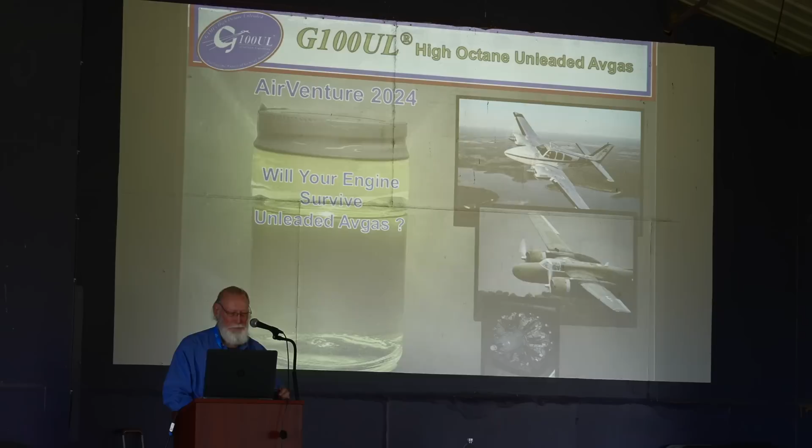Of course, nothing could be further from the truth. Nothing could be further from the well-documented truth, with an enormous amount of data to the contrary. So today, one of our themes is to simply ask you to believe the data. Let's focus on data.

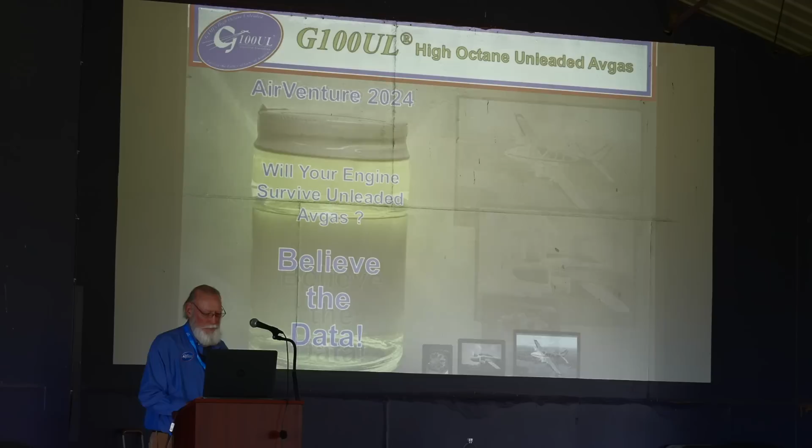So we're going to press on, and so I'm going to have a little bit of fun. Listen not to the GAMA and NATA chorus. That's the National Air Transportation Association, and GAMA is the General Aviation Manufacturers Association. Listen not to the GAMA and the NATA chorus loudly denouncing GAMI's FAA-approved AVGAS.

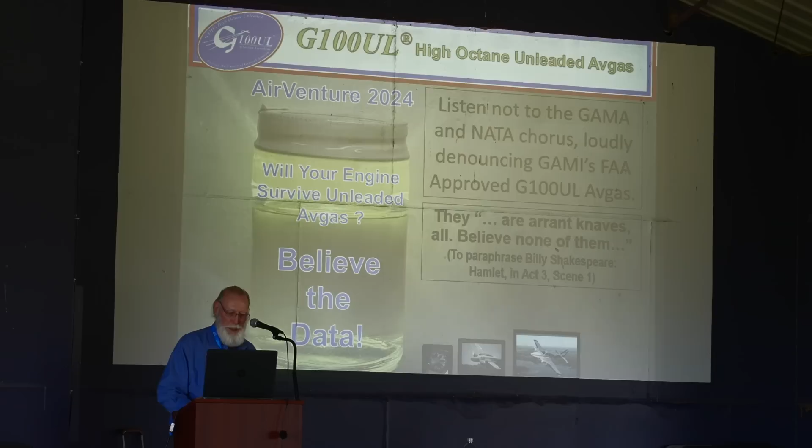So I'll take a little literary license. They are arrant knaves all, believe none of them. That's paraphrasing some guy named William Shakespeare, Hamlet, Act 3, Scene 1. Those knaves have no data.

I've used this slide off and on for the last 14 years. I was standing here, I believe, in the summer of 2010. We had a tent forum here about, oh horror, losing leaded avgas. The microphone was finally passed around to the president of Lycoming, Michael Kraft, and I remember specifically, I wrote it down, the first words he said to the crowd of about 3 or 4 times this size: we have to stop loving the problem and just fix it.

This is not a new problem. In about 1930 or 31, some guy nobody's ever heard of named James Doolittle flew an airplane from Ottawa, Canada to Washington, D.C., to Mexico City. It was a high-performance airplane, a speed racer. He had started using tetraethyl lead in his fuels, but he knew when he got to Mexico City they wouldn't have any leaded fuel, so he took a jug of tetraethyl lead with him. On the flight into Mexico City it started leaking, and he got so sick he could hardly land the airplane. He later wrote about it and said lead is not the solution, we need to find a better way to generate octane. Folks, that was 90 years ago. We can do better.

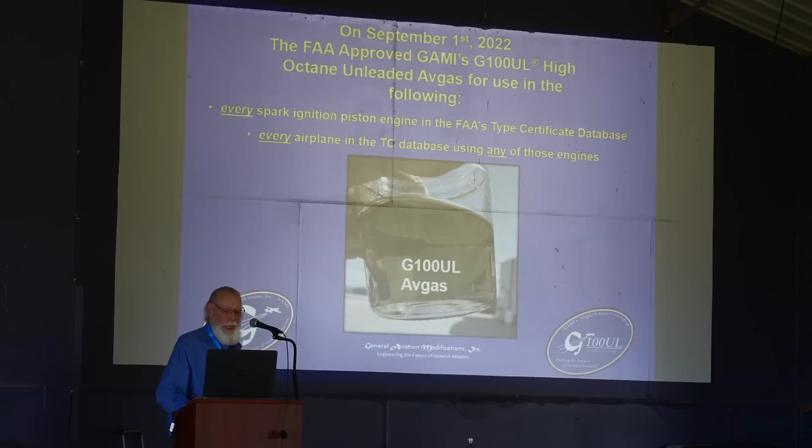Nearly 2 years ago, the FAA issued a fleet-wide approval for all of the aircraft spark ignition piston engines for G100UL, and they also approved all of the airplanes. The rotorcraft are pending, but they're well along in the certification process. I had an hour-and-a-half meeting with the FAA on Tuesday, largely focused on that subject.

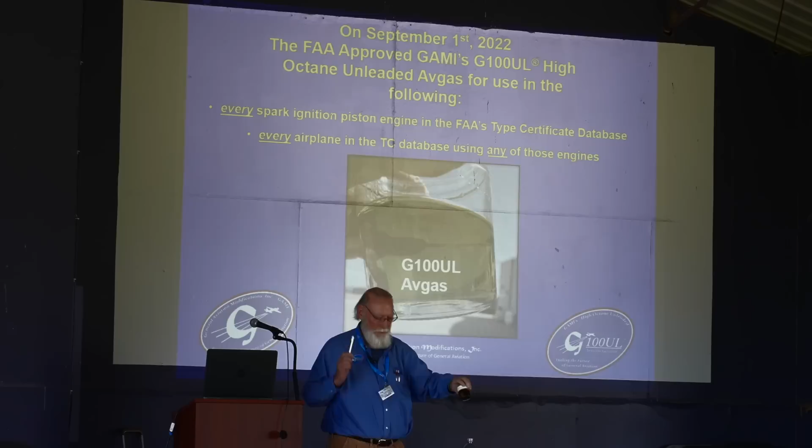So what you see here is the gas. This is a fairly aged bottle from about a year ago, but it tends to be green, yellow-green to blue-green, depending on exactly when it was made, and how much 100 low lead has been mixed with it.

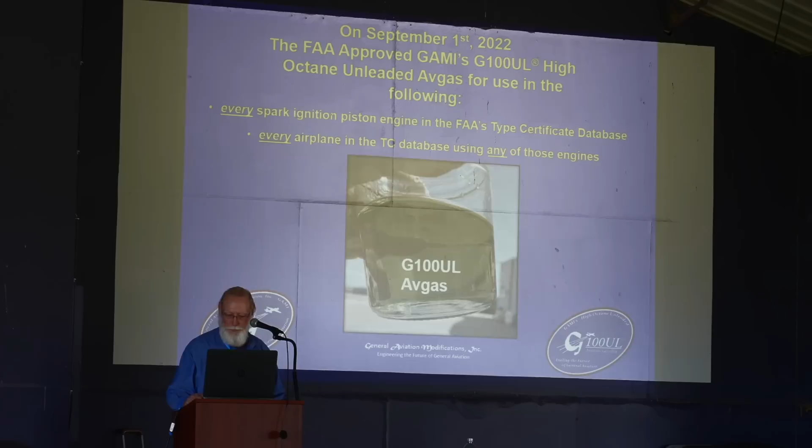At Sun and Fun, the announcement was made that G100UL gas is now commercially available. There's about 1.3 million gallons sitting in this tank right here in Baton Rouge, Louisiana, on the Mississippi River. We can ship fuel by rail, by truck, by river barge all the way to Pittsburgh, and by ocean-going barge anyplace in the world. One foreign civil aviation authority has already gone through the work with the FAA and done the Civil Aviation Authority peer-to-peer coordination, and has now approved all of the STCs for use in their country, and they're in the process of purchasing fuel that would leave by ocean-going barge from this facility.

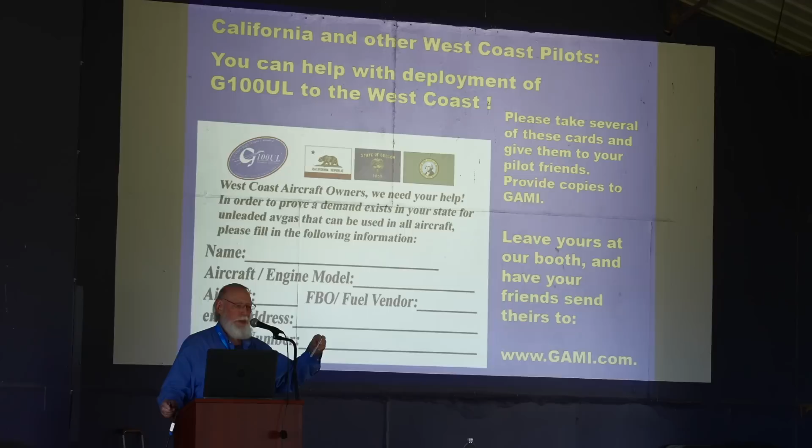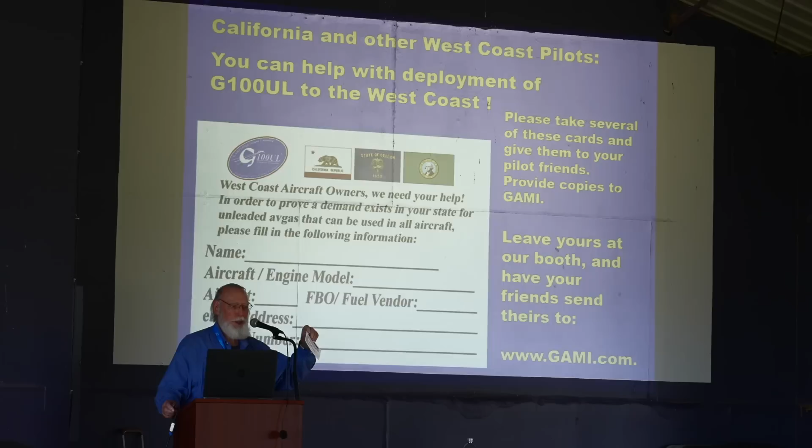So we have some of these little cards. How many people are here from the West Coast? Thank you, this card is directed for your attention. I've got a few of them, Tim Roehl over here has got some, or you can come by the booth, Tim's right there by the tripod. We'd like for you to fill these out and let us know who your vendor is, and if you don't want the fuel there, then don't bother to fill it out. But I'm going to assume that if you go to the trouble to fill it out, that you want G100UL available to you at your usual airport.

So remember, the phrase of the day is believe the data. I think most of you that know us and have experience with us realize that we've got a 25+ year history of innovating and certifying a lot of really nice products.

Many of you have. How many people in here have got GAMI injectors on their airplanes? There's 36,000 sets of those out there right now. The turbo-normalized Cirrus we did has millions of trouble-free operating hours on that fleet of engines. So we've got a long history of innovating and certifying new, innovative products. We've been Aviation Consumer Product of the Year several times.

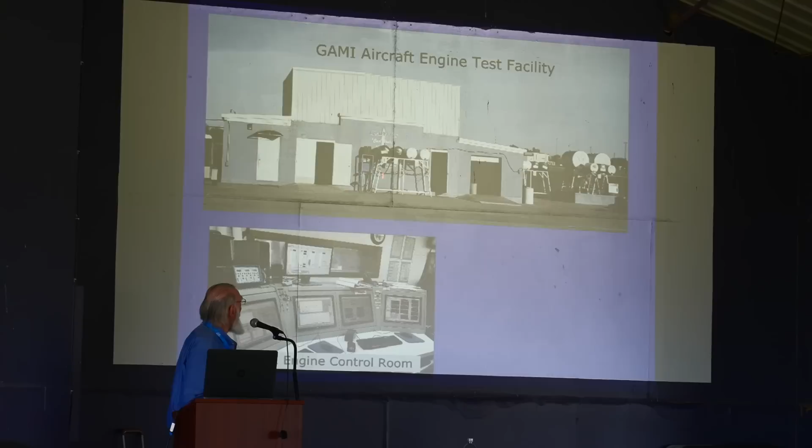This is GAMI's Aircraft Engine Test Facility, otherwise known as the Carl Goulet Memorial Engine Test Facility, and that's a mouthful. Carl Goulet was the Vice President of Engineering at Continental for 25 or 30 years. He personally designed almost all of the Continental engines in use today. He retired, became a DER, and we were using him on the GAMI injector project. He pulled me aside one day and said, "George, you and Tim need to build a test cell." "Well, I don't want to do that, it's expensive, la-di-da-di-da." "No, you really do." "Well, why do we need to do that, Carl?" "Because you won't believe what you will learn and what you can do if you do that." He was right.

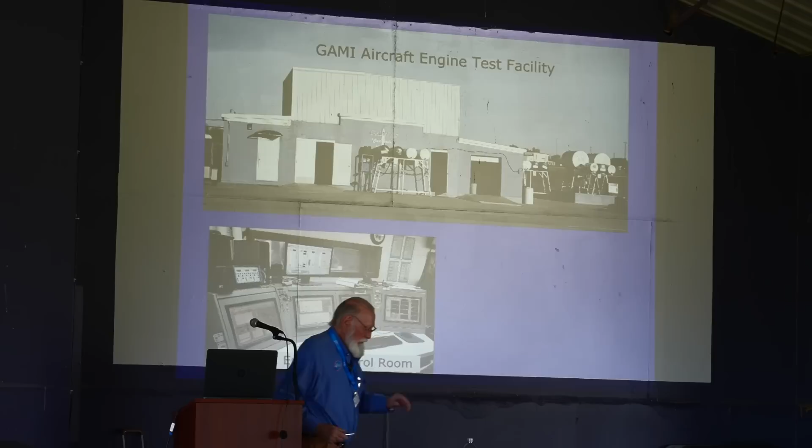So you see here also the control room. You see out here the tanks. I don't want you to think, why in the heck is he pointing out the tanks? Well, at the back of each one of those tanks is a solenoid valve, a solenoid valve that looks like this one, except it's got a coil up here.

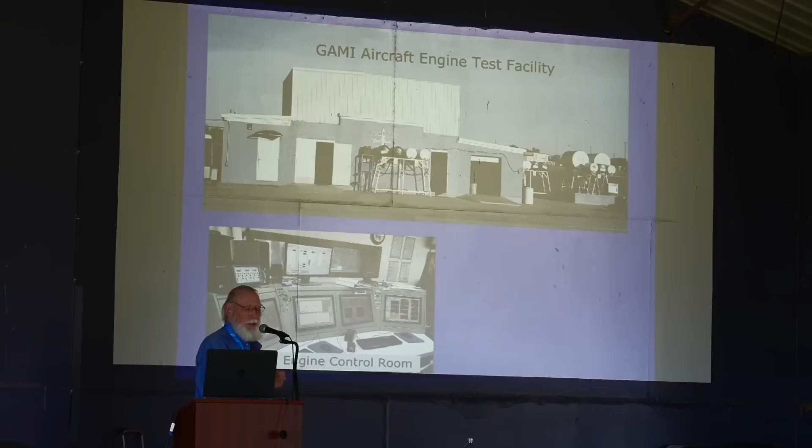This is the diaphragm in the middle. We use solenoid valves at both ends, out here where the tanks are, on all the multiple fuel lines that come back up into the engine here, and then there's a double parallel set of solenoid valves right at the engine. They work in parallel with each other. If you switch off one fuel, it switches two solenoids, so that in case one of them leaks, you don't get any contamination of fuel from one fuel type to another. We'll come back to that subject.

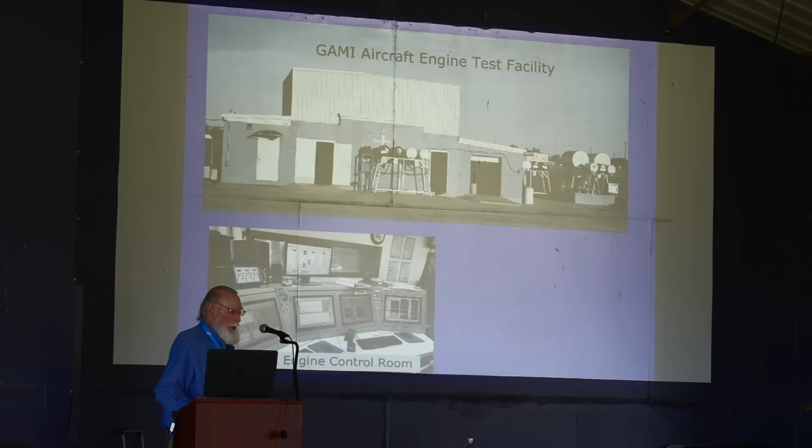And then you can see the instrumentation here. It's at least modestly sophisticated. How many pilots in this room have been to an advanced pilot engine management seminar class? So every one of you has had time to watch an engine run standing in front of this console. Is that correct? All right. So that's kind of open and transparent. And that's been open and transparent to a lot of people that should have, but have failed to take advantage of the opportunity to investigate further.

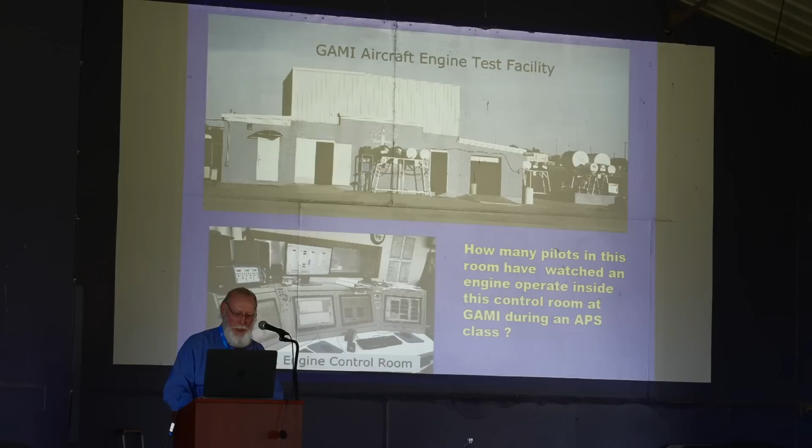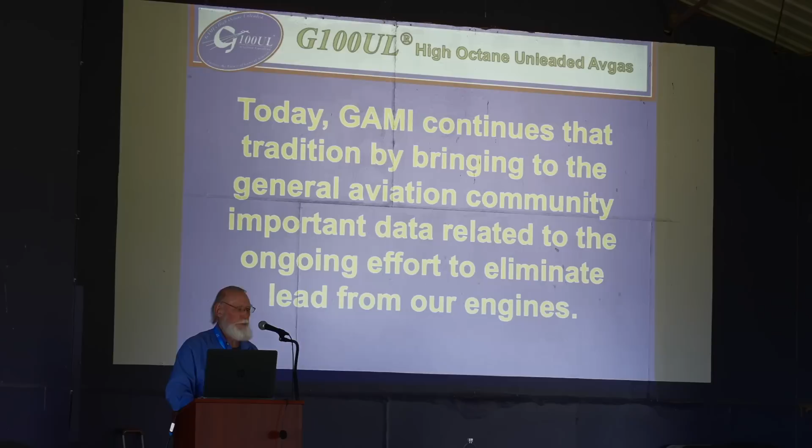So we have consistently supported the introduction and acceptance of our products by providing very high quality engineering data. And today we're going to continue that tradition by bringing to you and the general aviation community some important data related to the ongoing effort to eliminate lead.

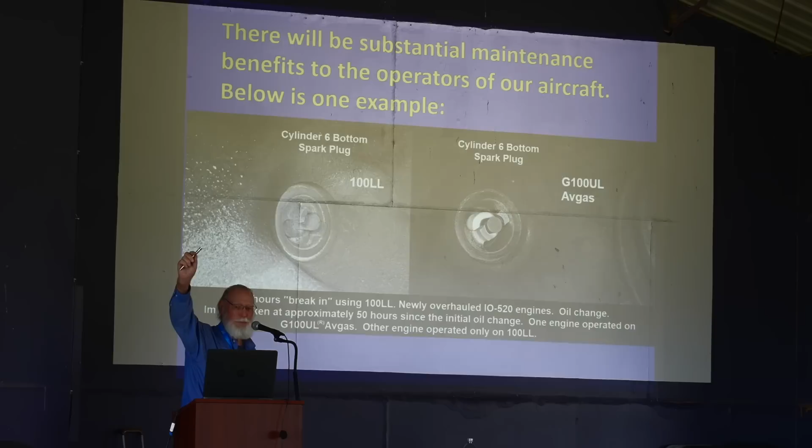How many people in here have never cleaned a spark plug? Never cleaned a spark plug. There you go, this young man right there. Stand up, sir, take a bow.

I showed this data on the oil analysis to the head of maintenance for the Commemorative Air Force, fleet of 200 warbirds that he's in charge of. And he said, 'Well, what about spark plugs?' And I said, 'How many spark plugs are in an R2800?' He says 36. I said, 'How often do you clean them?'

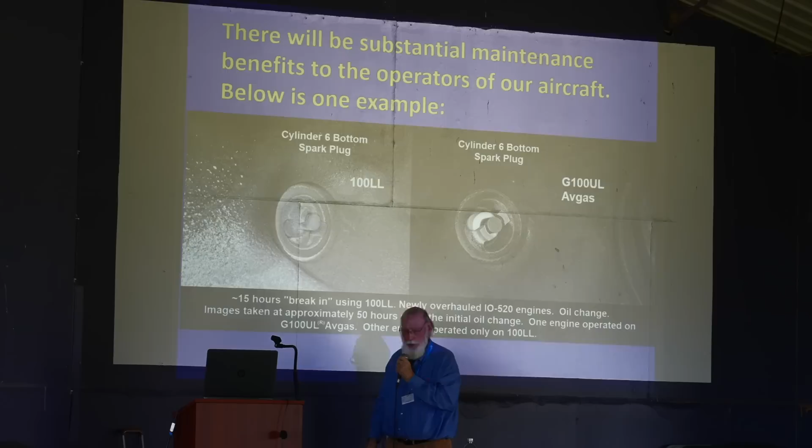'Every 50 hours.' I shoved this picture across the table to him, and I'm going to show you what he did. He sat there at his desk and looked at this, put his finger down on that and said, 'That's the fuel I want in all of the airplanes in the Commemorative Air Force.'

It takes 3 or 4 men 2 or 3 hours to take the cowl off an R2800 before they get to the spark plug, and it takes that many more to put it back on.

This is a huge change. We may well be able to go annual to annual, or double annuals, or maybe almost on condition, without having to ever pull and clean spark plugs.

In addition, our oil change intervals should easily double or triple. And when we then move to synthetic motor oil, our oil change intervals could easily get out to 150, 200 hours.

This is technology that all of us old people are inherently familiar with. When I was 16, 18 years old, we changed the spark plugs every 6,000 or 8,000 miles. We overhauled engines at 70, 80, 90,000 miles in my Pontiac Le Mans.

And I hadn't overhauled an engine in the last 20 years, and I don't remember ever paying for a spark plug in the last 20 years. That's what happens when you get rid of the lead.

Hey George, can you go back one slide? You said that overall, is the overhaul before those hours or in those hours? Now, this is at the end of 180 hours, but it's a composite of all the oil samples in between.

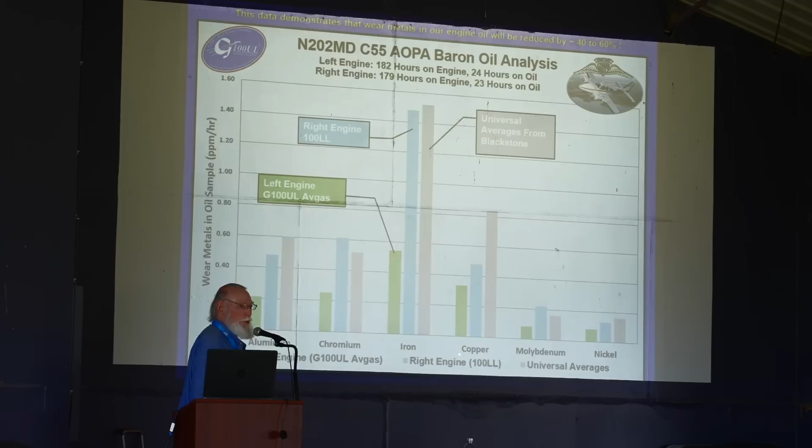Lots of borescope pictures. By the way, the gray bar that you see here is the universal averages from Blackstone for leaded gas in airplane engines. You can see that the 100 low lead engine matches the universal averages reasonably closely, maybe a little better, but that's probably because they've got better operators.

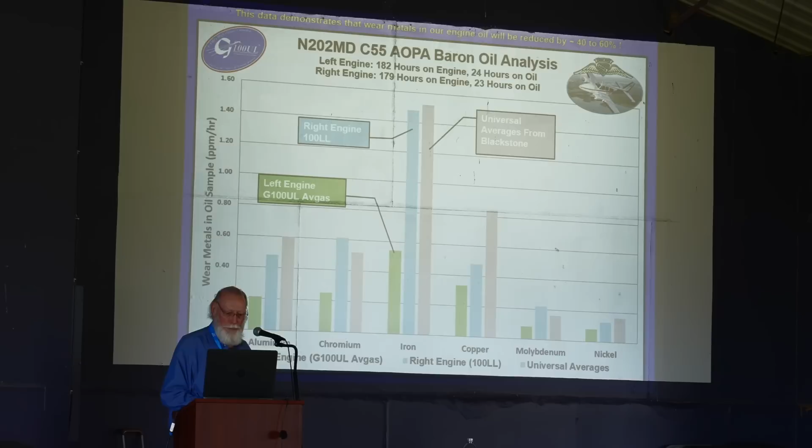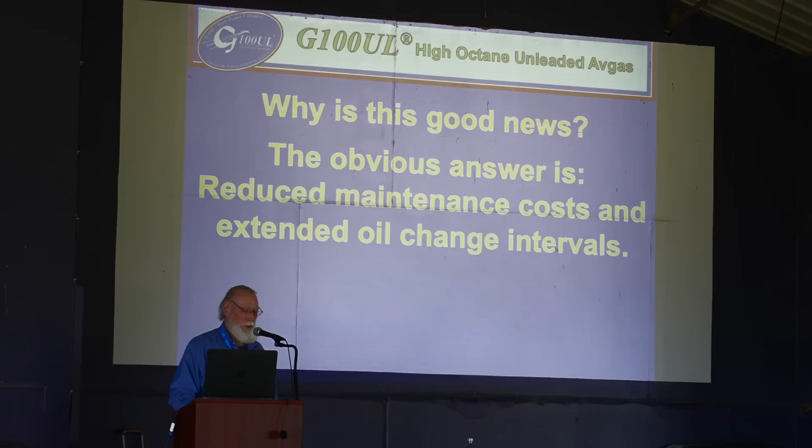So the obvious answer as to why this is good news is reduced maintenance costs. There may be more significant benefits.

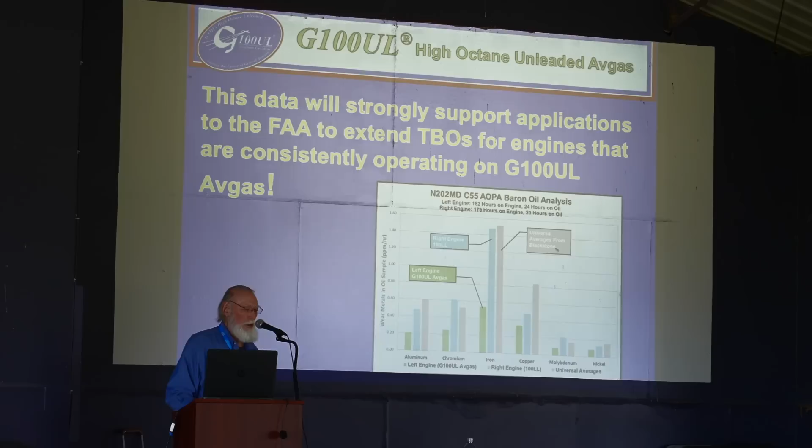As I mentioned, this data is going to strongly support a request to the FAA for some kind of STC or other approval to dramatically extend the TBOs on our engines.

So as I started out, in October 2023, UND announced that they were stopping the use of Swift UL94. The reason given, there was a lot of uninformed commentators talking about the use of lead and that kind of stuff.

Lycoming came back and suggested the problem was related to the presence of large amounts of aromatic components in Swift UL94. So we had some communications with the FAA.

They wanted us to review our flight manual supplement with respect to its language about intermixing G100UL and/or 100 low lead with UL94. We got started on that project.

Shortly after that, the FAA came to us and said we want you to look at your approved existing flight manual supplement and make a good faith effort to anticipate the subsequent approval of the two remaining fuels that use ETBE.

We thought about it for a while and decided that we had to undertake some research and development to understand it before I, as a DER, could write a report and recommend approval of the flight manual supplement amendment that is possibly coming down the road.

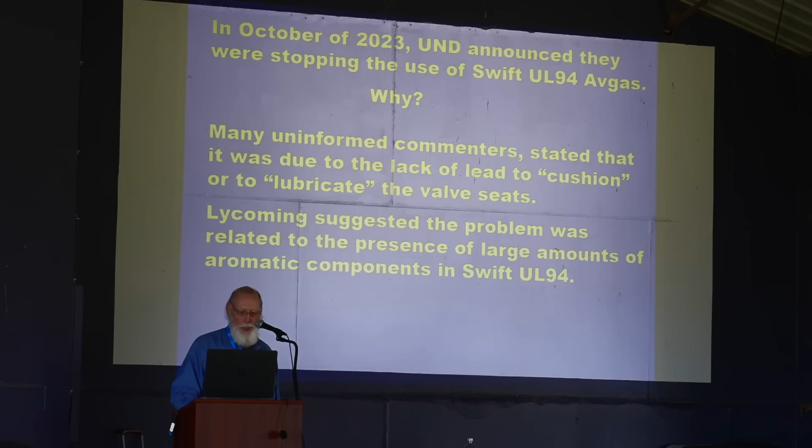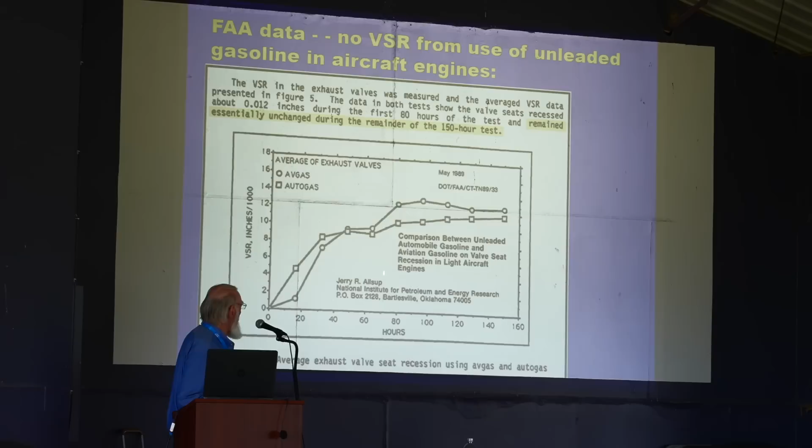Here's some data from the FAA's Tech Center, where they ran avgas versus autogas. What you see is they started out and the wear metals were going up and the valve seat recession were going up rapidly. Somewhere at 60, 80, 90 hours, they leveled off and basically were essentially flat thereafter. It's not my data, that's the FAA's data.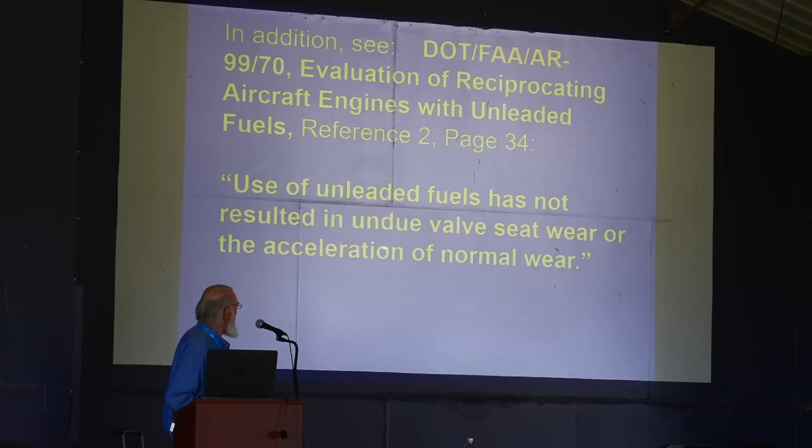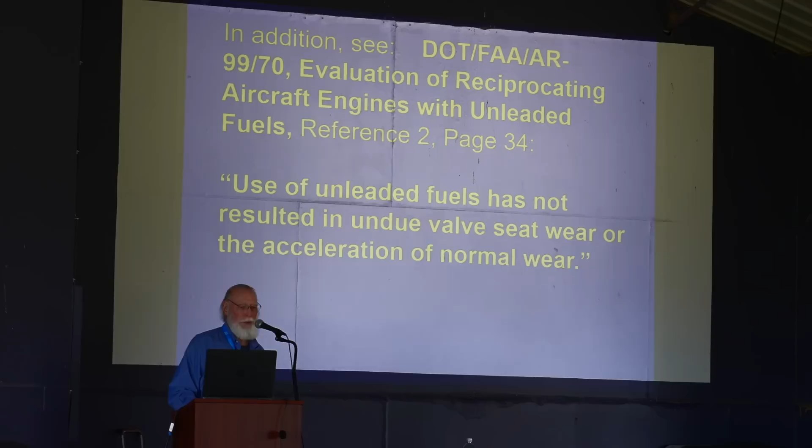Believe the data. This report, which you can find on the internet, states the use of unleaded fuels has not resulted in undue valve seat wear or the acceleration of normal wear. So those historic data points are completely contrary to the claims, data contrary to claims, uninformed claims I would submit, that somehow or another the absence of lead had something to do with the valve seat problems that were encountered at UND.

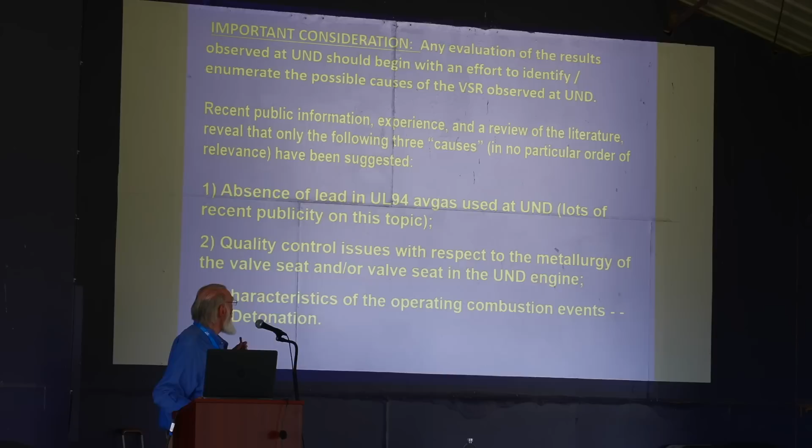So with that background, it's important that you got to sit down, be a good scientist, make a list. So we made a list of 3 things that are potentially competent causes.

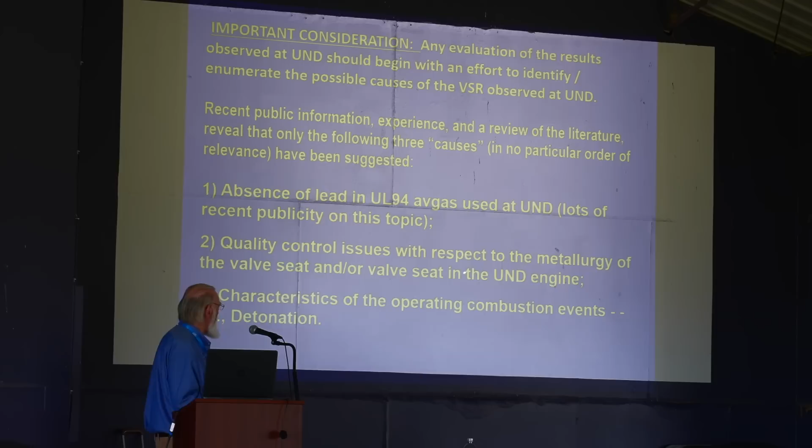One of those is the absence of lead in UL avgas. That was the talking points. The second one, the one we've already discussed, the quality control issues with respect to the metallurgy of the valve seat and or the valve seats in the UND engine. And then the characteristics of the operating combustion events, i.e. potentially detonation in the UND engines running on UL 94.

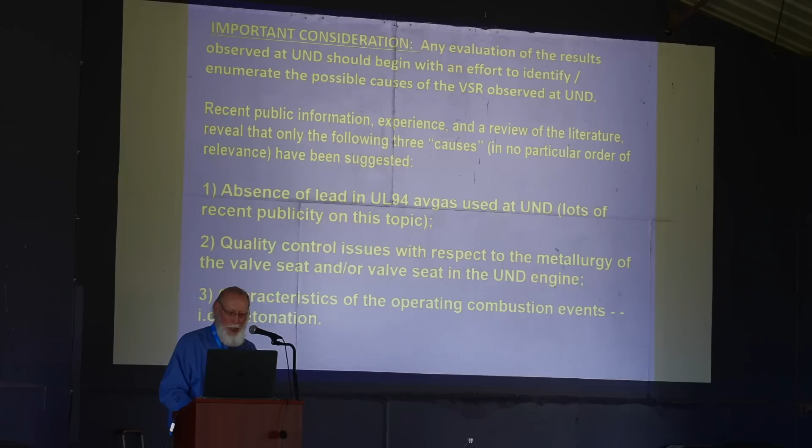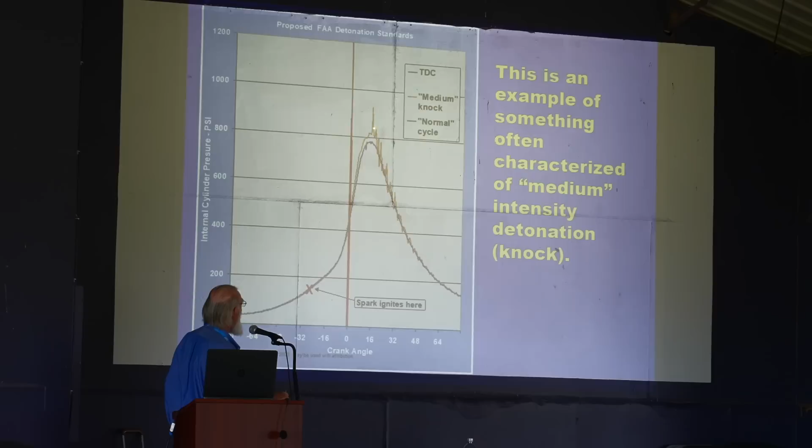This is a detonating combustion event. Notice the pressure spike from here to here, but then you get a lot of little other pressure spikes that are a result of a shock wave bouncing back and forth across the top of the piston. In the process, they bounce back and forth across the face of the valves.

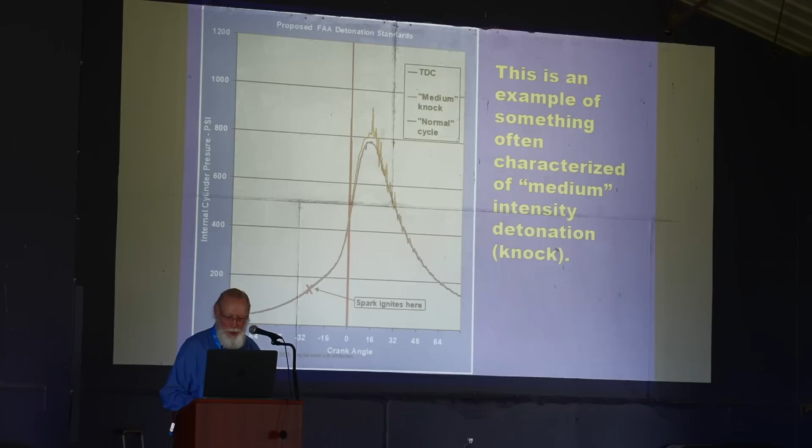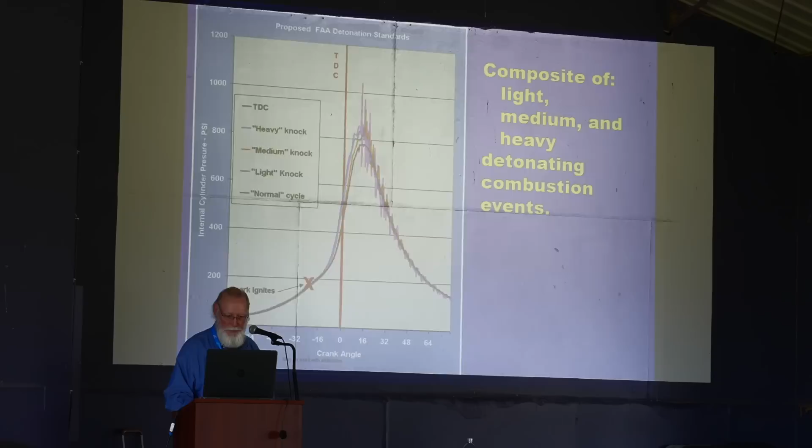So at 3,000 to 4,000 feet cruise at wide open throttle, 2450 RPM, this is 65 to 70% power. That's important for where we're going with this.

So then we're going to study this presentation a little bit. Remember, I told you the computer can calculate in real time and assign a numerical value to the intensity of detonation for each single combustion event. So we teach the computer to do that, and then each one of these dots, which we call a detonation point cloud, represents a single combustion event in a single cylinder, and the dots are color-coded by the cylinder identification.

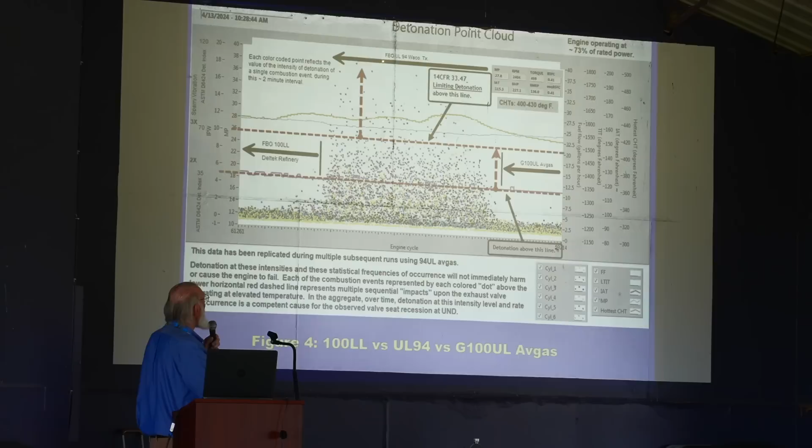So we started running it on G100UL. You can see there's no detonation activity. All we did was flip the toggle switches that switch those solenoid valves. Changed nothing else. And started running on FBO UL94 from Waco, Texas.

This would fail an FAA detonation report. Not only that, but this kind of detonation is not going to instantly destroy the engine or anything like it. And I will tell you that I don't think the UND engines were running quite this severely, but they were certainly running severe enough to generate a lot of this kind of stuff.

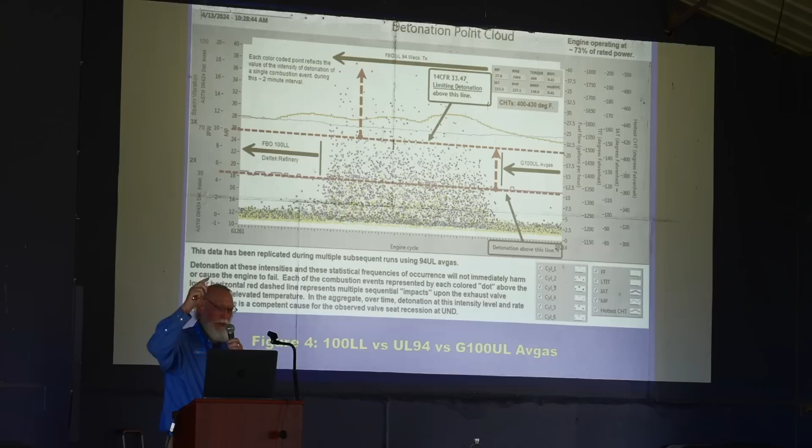And over time, remember when we looked at the shock wave that's associated with a detonating combustion event, you've got a shock wave bouncing back and forth at 4,000 times per second across the top of the piston, and that shock wave is going past the valves, and every time the shock wave goes past the valves, it bounces the valves by 20 to 100 psi of pressure.

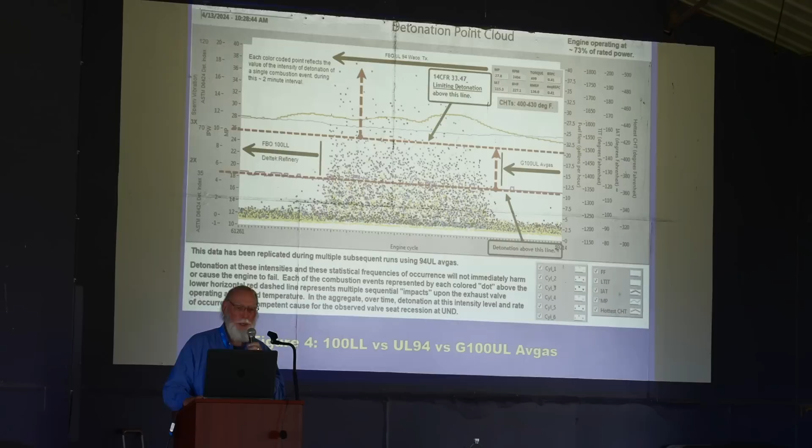As I said, we have replicated this data multiple occasions. Some very, very experienced combustion engineer fuels experts have been present in the test stand and observed the collection of this data. So here is another run, very similar.

So again, we started out on either 100 low lead or G100. In this case, we had changed the fuel-air ratio and made it much richer, and that reduced the level of detonation intensity from the cruise mixture setting that was being used at UND.

Why did George do that? George did that because he was trying not to destroy the engine.

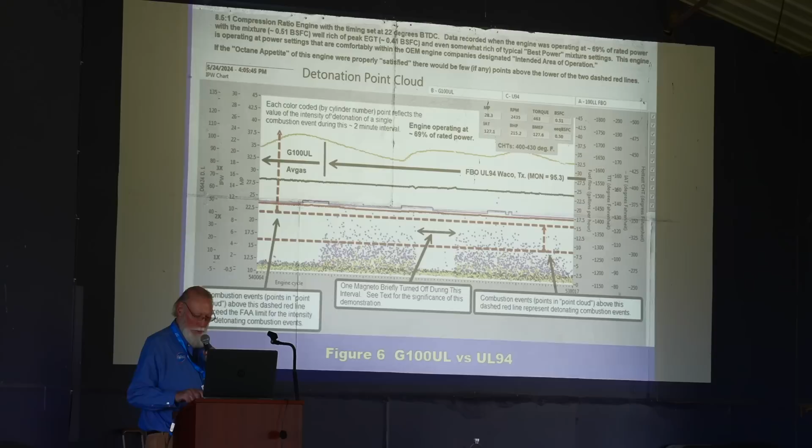And then it continued from here to here, but here's this thing right here. What the heck happened right there? And what happened right there is we simply turned off one magneto.

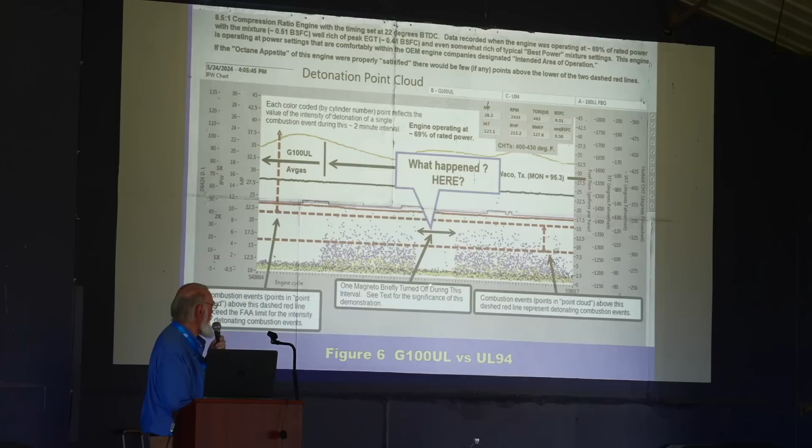Now, for those of you that have been to the APS class, you all understand that running an engine on one magneto has the functional effect of retarding the timing on both magnetos, if you had both of them retarded by 5 or 6 degrees. If the magnetos on the engines at UND had been timed at 20 or 21 instead of 25, they would have never seen this stuff or this stuff. They would have seen only this kind of stuff.

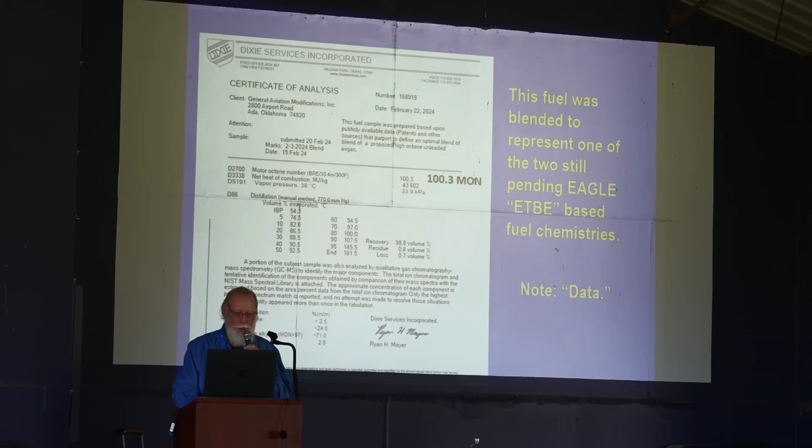So then we switched from focusing on the UL94 because the FAA asked us to come up with a plan for intermixability, and we decided we need some data. So from the best available public information, we formulated 2 different versions of ETBE-based fuels. This is one of them. It tested with a motor octane of 100.3, and we started out to run it.

Now, in this case, you're not going to see fuel on, change fuel. This is all 100 low lead from here to here. This is about 15 seconds. I deliberately wanted to spread it out to get a little more definition.

So you can see the engine's running at 31 inches, 2,700 RPM, and it's running really, really rich at 0.72. That's as rich as a Navajo Chieftain. A Continental 550 would normally be at 0.56, 0.58, 0.54. Some Lycomings would be as low as 0.51. So this is what I would refer to as a GAMI-rich mixture.

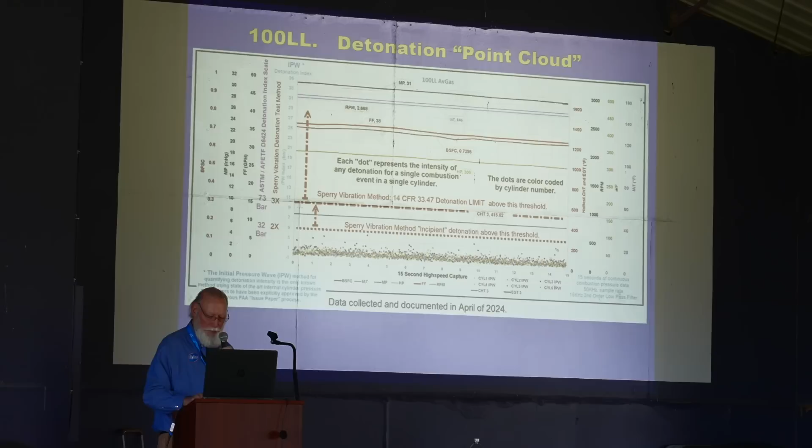And the CHT line across here is constant, which means there's no detonation because it's not inciting anything. Again, these are FAA thresholds. So here we are running on FBO 100 low lead from the Delek refinery in Tyler, Texas. So then we switch, do nothing else except switch those solenoid valves, and we're running on the ETBE-based fuel chemistry.

I started off with the BSFC down here, but trying to do that, I quickly had to move it up so that it was as rich or richer than before. Even then, at 36 gallons an hour on a 300 horsepower engine, it was still detonating. And it wasn't just one or two cylinders, almost every cylinder on the engine. That's pretty unusual to see that many cylinders detonating at the same time. It's usually one or two and a little bit on the third one.

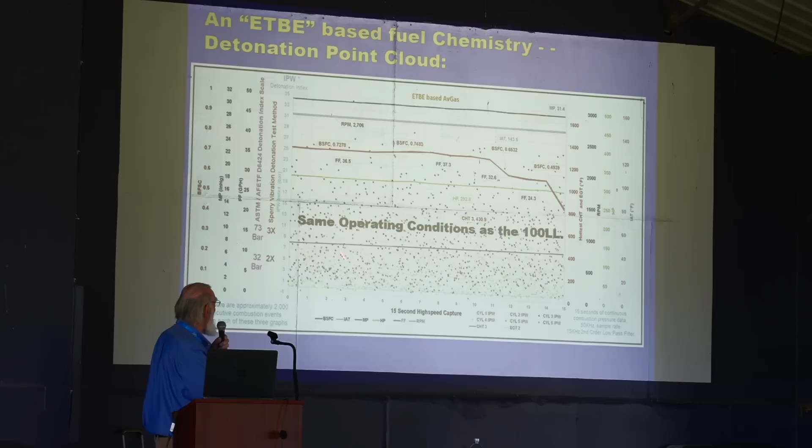So then we switch fuels again. This is the same exact operating conditions over here as on the 100 low lead. We switch fuels again, and now we're running the engine, changing nothing except the solenoid valve. Just as an experiment, I wanted to see how lean I could get it before it started to detonate. So I started here, leaned it to here, and leaned it again to here, got nothing. Completely transparent and detonation resistant regardless of the fuel-air ratio.

Folks, data. Believe the data.

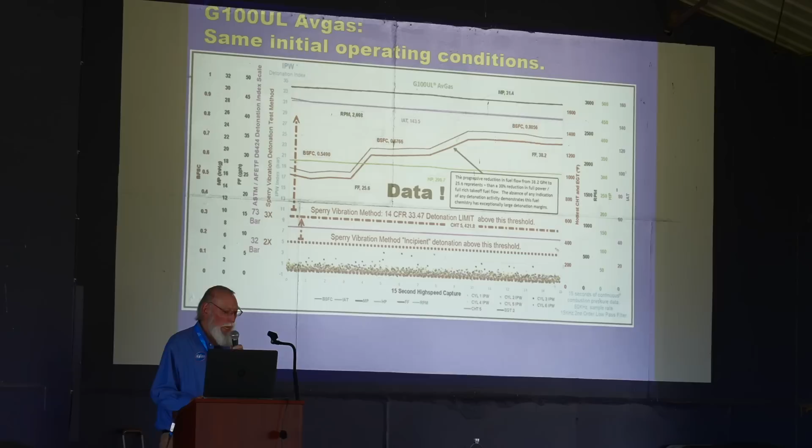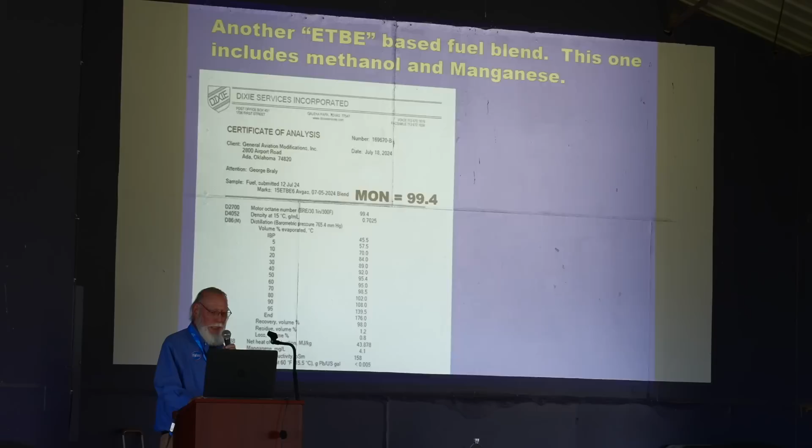So this is one of the best possible replications of one of the two ETBE e-fuels that we know how to produce. Here is another one. It had a MON of only 99.4. This is one that had methanol and manganese. We went back to the former format with this fuel.

Over here, the engine's running on 100 low lead with no detonation. Over here, it's running on 100 low lead again. We've rescaled the detonation, here's the two FAA thresholds. And you can see that when we switch to this ETBE plus methanol plus manganese, there was 4 milligrams per liter of manganese, according to Dixie Labs, in this fuel.

Almost immediately when we switch fuels, you'll notice the CHT. This is the hottest CHT, it was at 435. As the detonation started, it immediately started climbing. That is absolutely predictable and absolutely confirms that this is detonation that's going on that's causing that. The only reason it went back down is because the computer equipment recognized that we were now within 4 degrees of red line on the engine and took over, enhancing the cooling airflow in order to keep from destroying the engine.

Manifold pressure was constant across this whole thing.

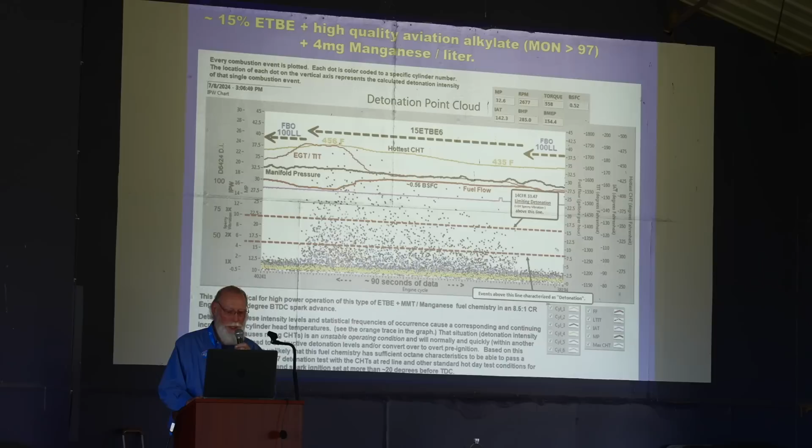So at any rate, I could not let anybody I know, as a pilot that's a friend of mine, fly an 8.5 to 1 compression ratio engine with anything more than about 20-degree timing, and maybe less than that, on this fuel chemistry. Now, maybe whatever they end up approving is going to be different, I don't know that. But what I know is that this, from all of the available public information, very closely resembles the fuel that is remaining in the Eagle program.

Many years ago, I became a personal acquaintance with the then Deputy Administrator, Anthony Broderick. He once told a group of pilots that any applicant could do almost anything, provided only that they had valid data to support their certification project that was pending with the FAA. It was Anthony Broderick who encouraged Tim and I to start the GAMI injector project. I kept complaining about how hard the STC process was. He kept telling us we didn't have any right to complain because we didn't have a project. So we opened one, and 4 months later, he had to directly intervene from Washington to get the project unstuck.

Are you seeing the data? Anybody think they're not seeing data?

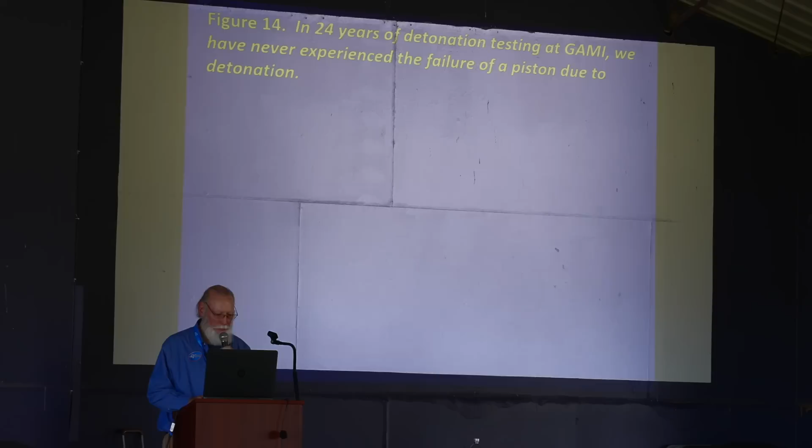So in 24 years of doing detonation testing at the Cargill Lake Memorial Engine Test Facility, I have never destroyed a cylinder or a piston. I don't know which of the two ETBE fuels was responsible. I've got a pretty good notion, but I'm not going to speculate without studying the data. But after 24 years of never destroying a piston, we managed to do that in less than 5 or 7 hours of test time on ETBE fuels.

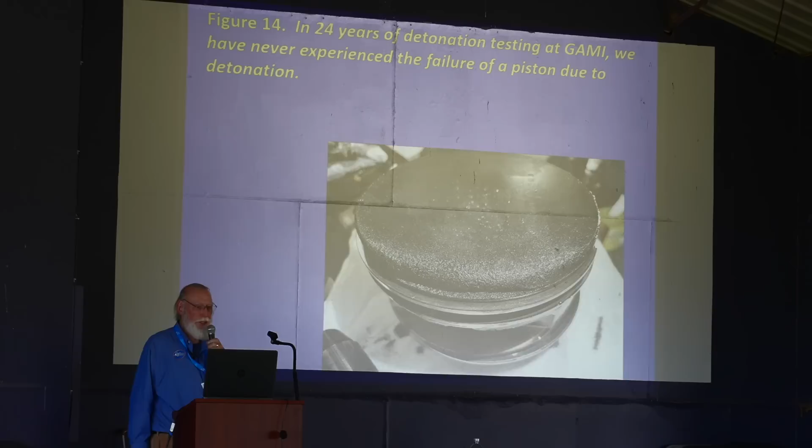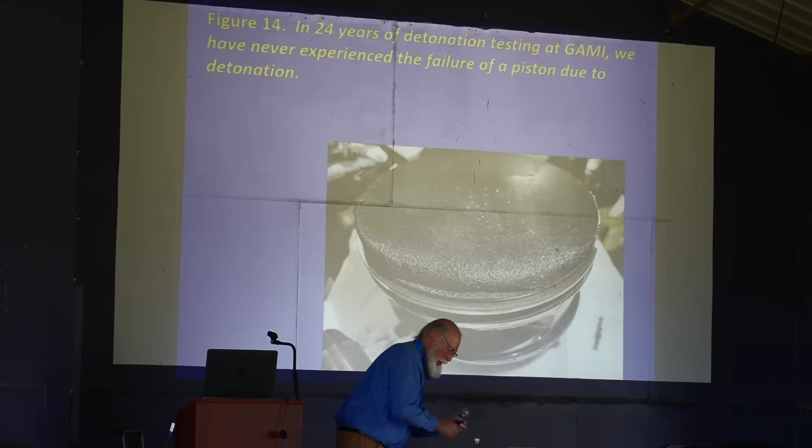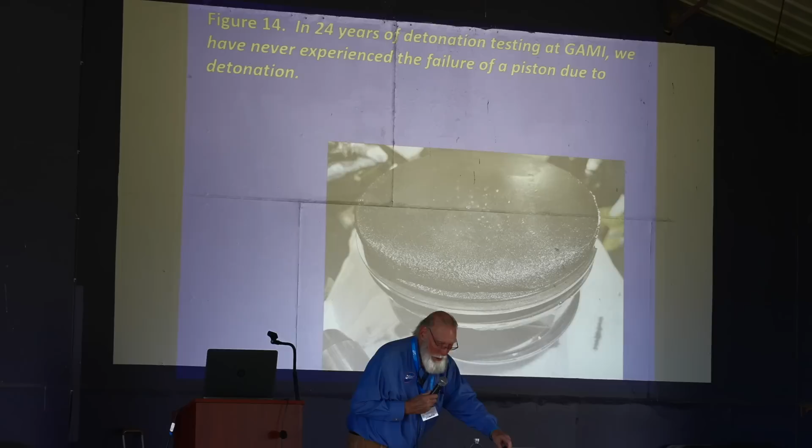I cleaned up half of the piston over here and got the oil off of it, but feel free to come up and inspect it. This is classic for significant, even elevated, heavy levels of detonation that you see when that happens on an engine. There's actually a piece of aluminum that's missing. One of the rings cracked in 3 places and fell off when we took the jug off. So like I say, feel free at the end to come up and lay hands on this and inspect it for yourself.

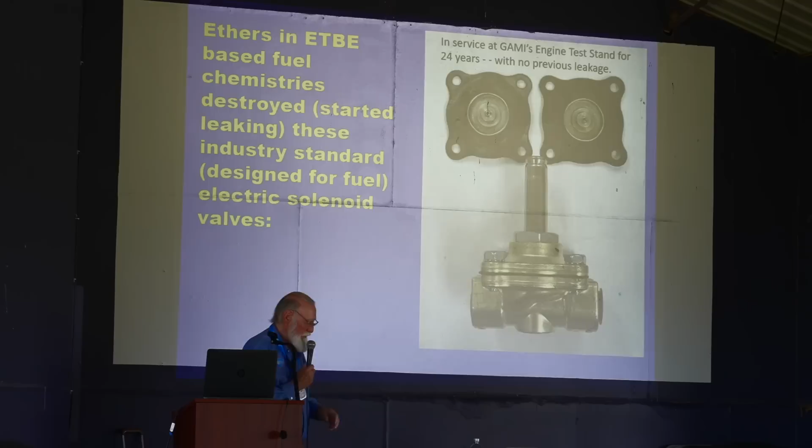In addition, in 24 years, remember I mentioned all these solenoid valves? They're critical to being able to do reliable testing, to have them working right and not leaking. After we had ETBE-based fuel exposed to those solenoid valves, we had 6 of them fail within a week or 2 of each other.

They failed because the diaphragms got stiff and brittle and started leaking. I don't think it's a coincidence that after 24 years, the only thing that changed was the fuel chemistry. Am I absolutely certain the change in fuel chemistry caused this? Not certain, but very close to certain until I see data to the contrary. Those are data. I have them here with me.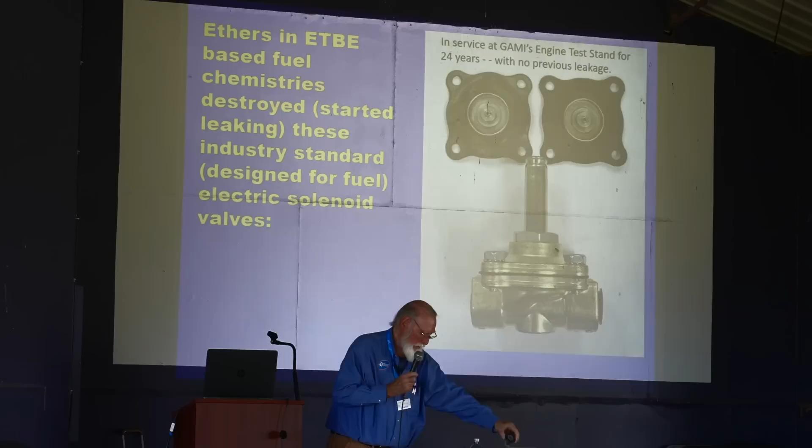Does that diaphragm look a lot like this diaphragm? It sure does. So somebody's going to have to prove otherwise with respect to this diaphragm. Again, data.

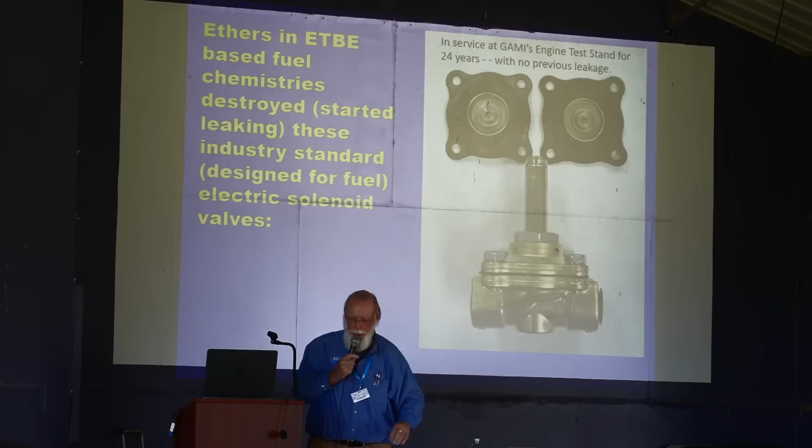24 years, those solenoid valves. I checked with some people at 2 different major oil companies, and when they started using ETBE, which is an ether - ethyl tert butyl ether, MTBE, which we all had in our car gas for a while, is another ether - and when the refining industry started dealing with ether fuels, they had a whole bunch of solenoid valves, called red hat solenoid valves, and they all started leaking when exposed to the ethers, 30 years ago.

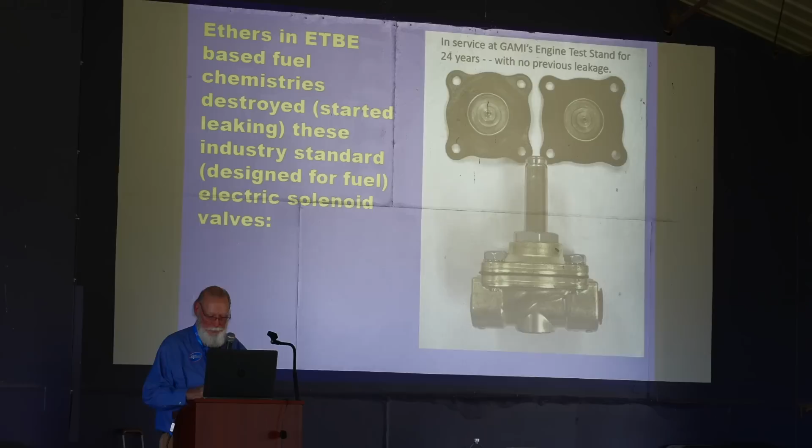This is less than 6 weeks of exposure. Again, it's data. So, some summary real quick.

The UL94 avgas is likely not suitable for 8.5 to 1 engines with 25-degree spark advance, and this is a potential safety of flight issue. There is a formal written report, approved by the propulsion engineers in the FAA, that has been submitted to the FAA and is now data that has been accepted by the administrator.

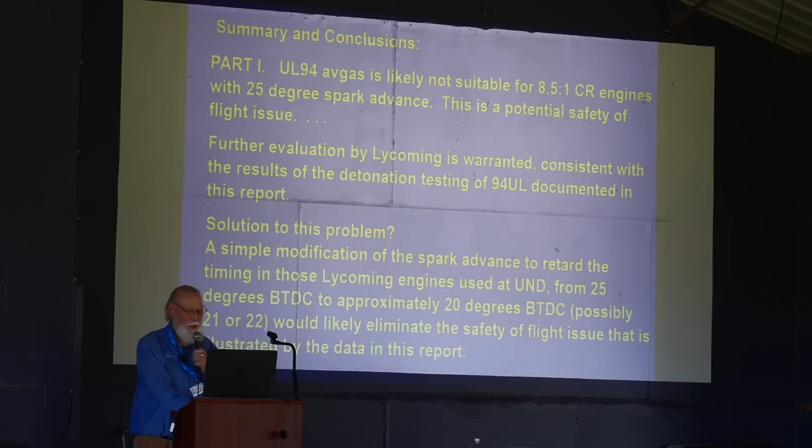A further evaluation by Lycoming of this situation is warranted, consistent with the results of the detonation testing here. I'm anticipating being able to sit down with Lycoming and meet with them here at Oshkosh.

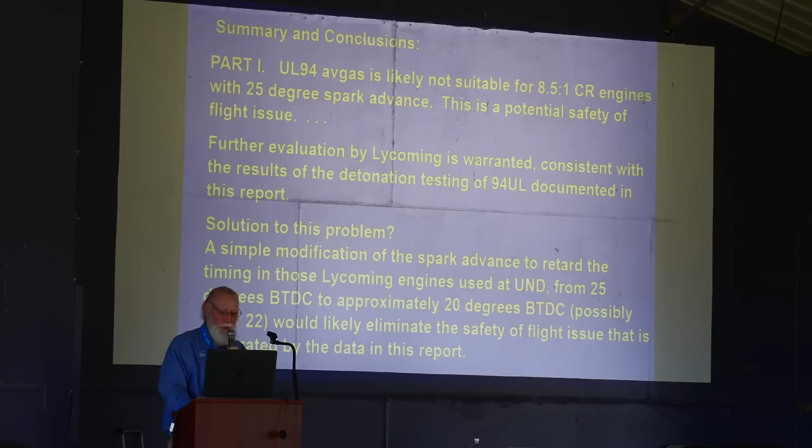Solution to this problem: if you're going to continue to use 94UL, you need to modify the engines and retard the timing. I think if it was retarded to 20, maybe 21, maybe possibly 22, but more likely 20, then that would eliminate the safety of flight issue raised and documented by this data, for which, so far as I know, there is no available contrary data.

So part 2A and B, those were the 2 identified ETBE-based fuel chemistries seeking FAA approval. They're likely, based on this data, only going to be acceptable. And again, the final version of the fuels may be different. If they are, I'll be glad to rerun the testing.

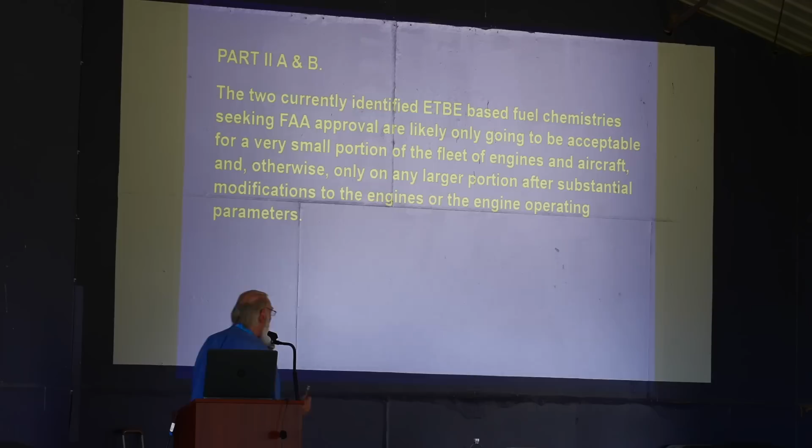But based on this data, they're likely only going to be acceptable for a very small portion of the fleet of engines and aircraft, and otherwise only for a larger portion after substantial modifications to the engines or to the operating conditions.

Okay, we're going to restrict the manifold pressure to 25 inches on takeoff, or you're going to have to retard all the spark timing by 5 degrees, or we're going to reduce the maximum cylinder head temperature from 460 to 420, or from 500 to 430. And oh, by the way, you can't take off when the outside air temperature is over 95 degrees. You can, as an engineer, conjure up all kinds of things that might be able to be done.

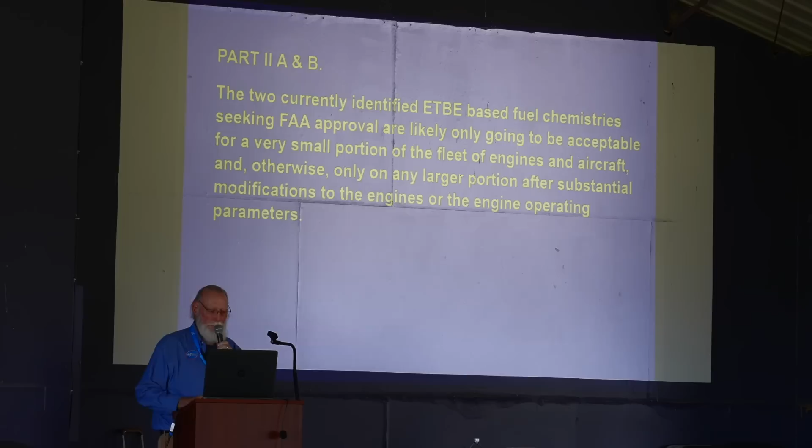Continuing with the two ETBE fuels, almost certainly the high-powered turbocharged airplanes - Navajo Chieftains, turbocharged Bonanzas, Cessna 210s, turbo-normalized Cirrus SR-22Ts - they're not really going to be able to operate on these fuels without significant modifications.

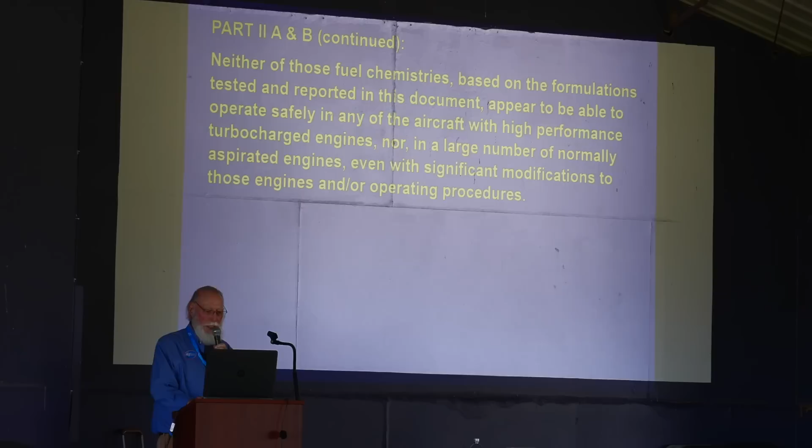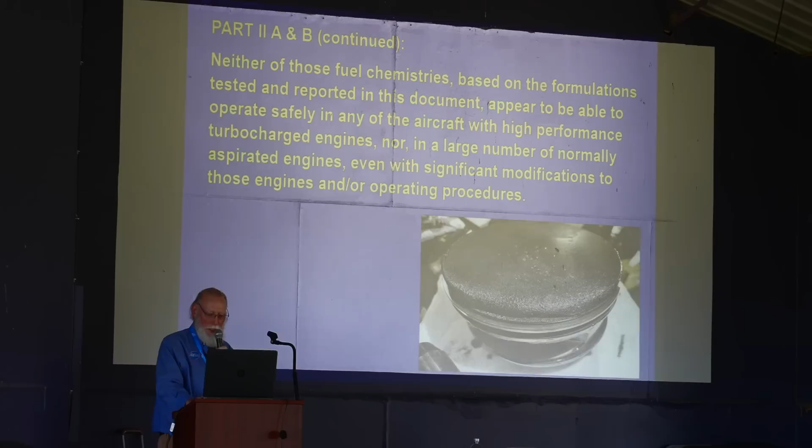And of course, this is categorically definitive evidence of the safety of flight issue. So,

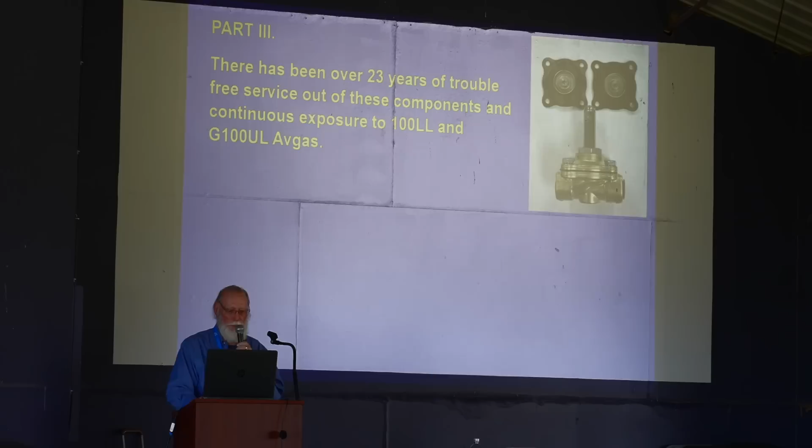The third part of the report was added on when we started discovering these material compatibility issues. There's been over 23 years of trouble-free service out of these components, having been exposed not only to 100 low lead, but to G100UL in 50 different variations, and to an almost indefinite number of other fuel chemistries that came to us during the mid-2000s time frame from the refiners I mentioned earlier.

Pardon? Yeah, it's a microphone, folks, so let me try a little.

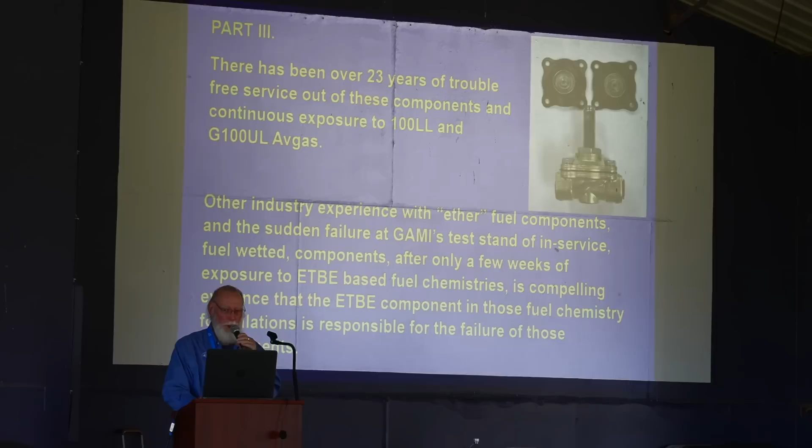So, like I say, all these components have been subjected to a vast array of fuel chemistries, and I cannot imagine that it's not causally related. Their failure - I think there were 6, maybe 8 of them that failed almost simultaneously. The ones that did not fail had not been exposed to ETBE fuel chemistries.

This is just a flashback.

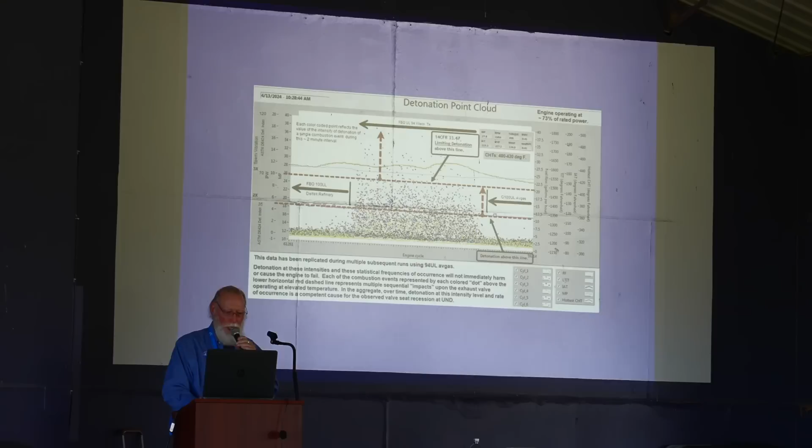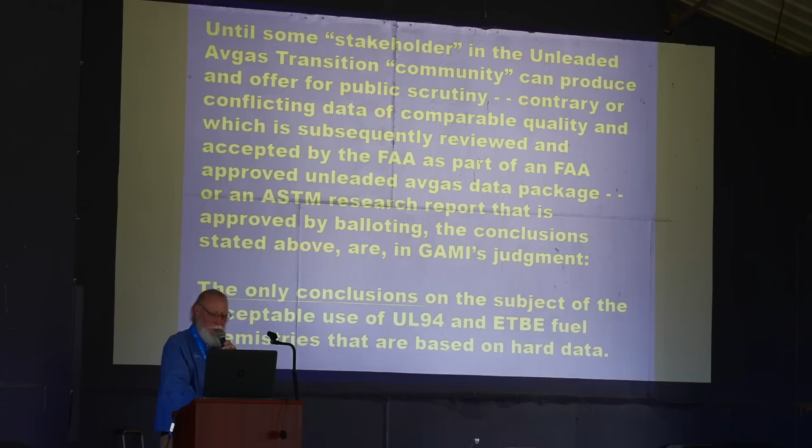Believe the data, until some stakeholder in the unleaded avgas transition 'community' - sometimes I wonder how much of a community it is - can produce and offer for public scrutiny contrary or conflicting data of comparable quality, which is subsequently reviewed and accepted by the FAA as part of an FAA-approved unleaded avgas data package, or potentially by an ASTM research report approved by balloting. Then the conclusions stated above are, in GAMI's judgment, my judgment as an FAA engine power plant flight test DER, and multiple others, the only conclusions on the subject of the acceptable use of UL94 and ETBE fuel chemistries so far based on hard data.

Questions, anybody? Pardon?

Rotax - so what? They run fine.

Next question. Yellow shirt. I'm getting old and hard of hearing - why don't you stand up and speak louder?

Did the FAA pay for that study? The FAA has never offered to pay us a penny to do anything, okay? We did that because the FAA had tasked us with writing an engineering report to substantiate potential changes to the flight manual supplement. Rather than just waving our hands and saying we think we ought to do this, it was really important that we have data to support it. All of this data has been shared with the FAA, including at senior management level.